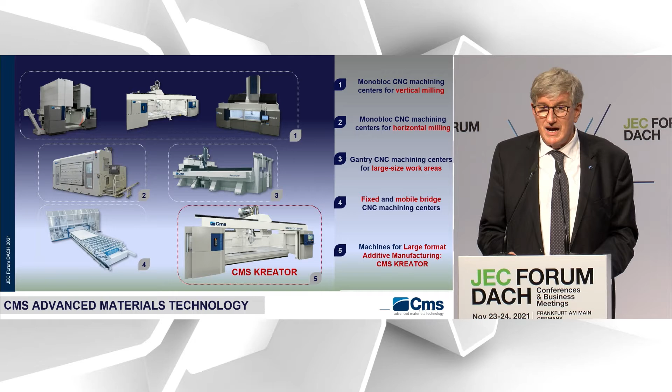We are in the machinery side, manufacturing CNC machining centers with different shapes, different sizes, and different functions. The latest one is CMS Kreator RS, a large format additive manufacturing hybrid machine.

Our sectors are the classical ones: composite, automotive, marine, aerospace, motorsport, railway, with a wide portfolio of special solutions.

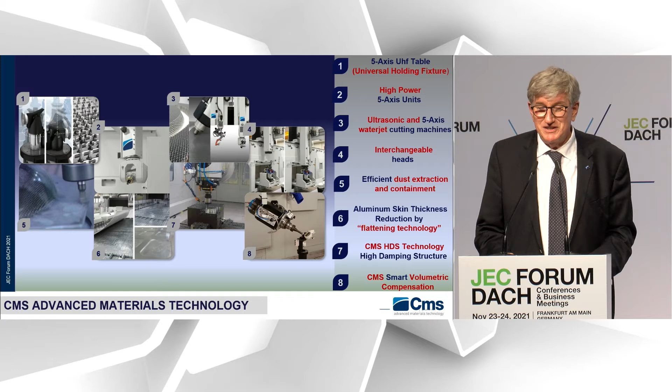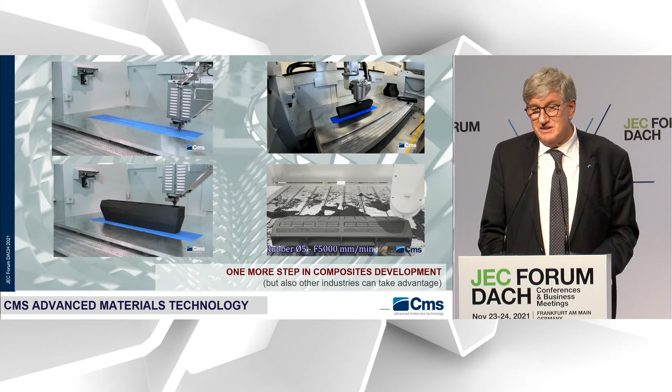I am not going into detail on every solution because it takes quite a long time. The latest solution is large format additive manufacturing combined with milling, that is CMS Kreator RS. One more step in composite development, but other industries can also take advantage of this.

A good question: why does a machine tool builder start to deal with additive manufacturing? That is far from our tradition, something completely new, needing a significant effort of research and development. This is why, to make money maybe not immediately, but in perspective, since additive manufacturing is a young technology, a young industry, a young market, but with a huge growing pace.

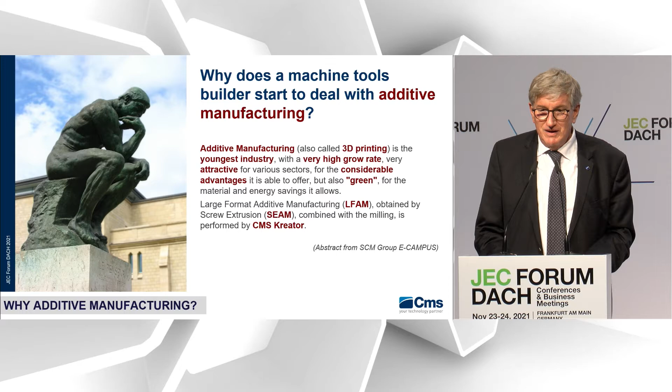Here we can understand visually what I mean when I say it's a young industry. In the timeline there are some milestones related to the composite industry: 1981, the first Formula One with a monocoque made of carbon fiber. In plastic industry, a good milestone is the Nobel Prize to Giulio Natta for isotactic polypropylene.

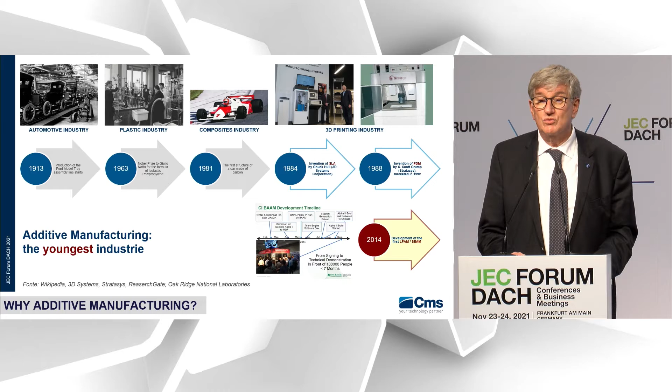In this time, you can see the growth rate. In the early stages, until 2009, the growth rate was not bad, 9%. But in the period from 2009 to 2019, the growth rate rose to 28%.

Why? Because additive manufacturing, starting from prototypes, goes to manufacturing, to industry. Especially large format additive manufacturing is focused on toolings. Toolings means 19% share of the overall market, and is interesting for aerospace, automotive, and industrial machines.

That is 61% of the growth in this decade. But marine can also take advantage of this. You will see where the great competitiveness of the new technology is: in terms of material, energy, and process time saving.

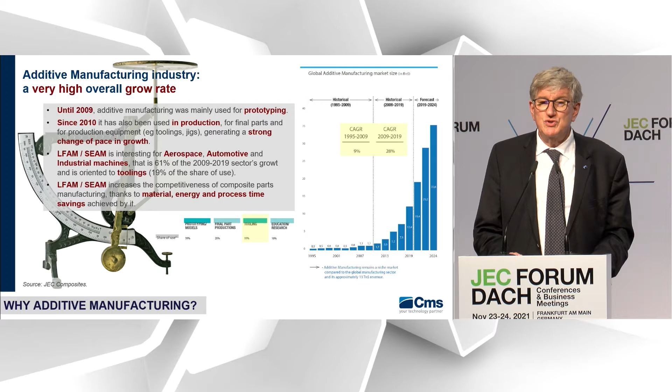Our solution has 4 milestones, 4 strong reasons why, as our marketing department likes to say: a unique solution. It is the only machine that fully integrates a machine tool for composite and a large format 3D printer, with a raw material cost saving factor more than 5 times compared to traditional technologies, and also 5 times less material than competitors to print the same part.

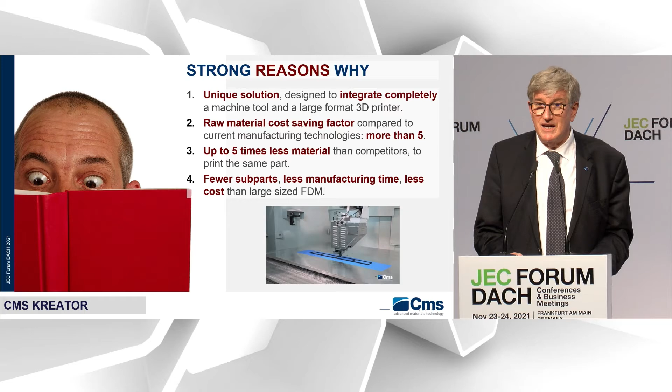In a context of FDM replacement: fewer subparts, less manufacturing time, and less cost than large-sized FDM. This is the machine. It is simply a CMS machining center, also coupled with an extruder to get screw extrusion additive manufacturing and standard milling.

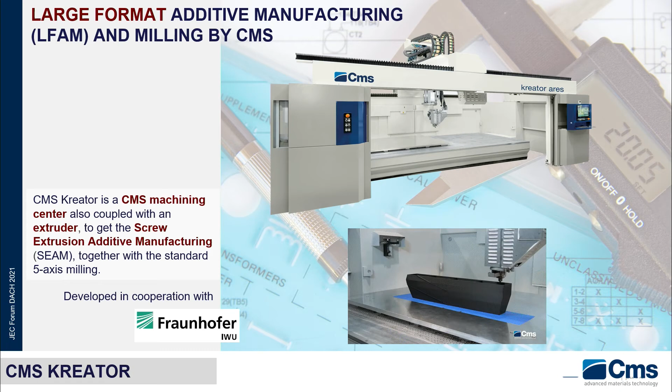We have developed this project in cooperation with Fraunhofer.

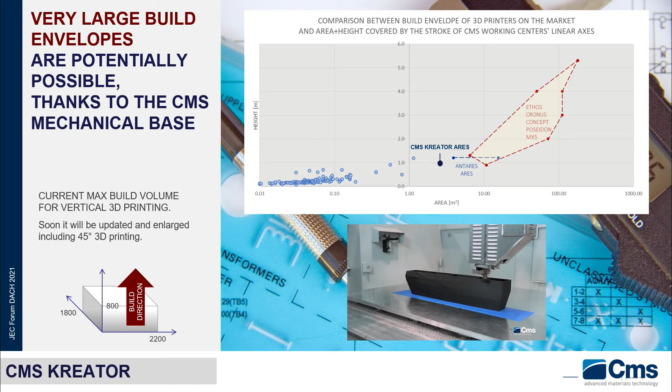In the picture you can see the huge perspective in terms of build volume that can be achieved by coupling additive manufacturing technology with a machine tool. On the right side you can see the range of strokes of our machines, and on the left side, the same position, that is the build volume of current 3D printers on the market. By the way, the max build volume has to be updated because every day we try to do something more, and you will see an example that explains better than figures what I mean.

One point is the quality of the extruded plastic. We have worked together with a prestigious Research and Development Institute because we would like to get the maximum obtainable quality of plastic. Just a figure that is not written there, but to understand what I mean.

The young modulus of this material printed in the picture, that is PA6 with 40% carbon fiber, is 13.6 gigapascal in the direction of printing. In the interlayer direction, which is the most critical measurement because it gives a precise indication of the quality of the 3D printing, we have a degrade of less than half, that is 6.5 gigapascal, more than plastic. You know, ABS is 2-3 gigapascal of young modulus. That means vacuum integrity, the impossibility of having voids and passing air or vacuum.

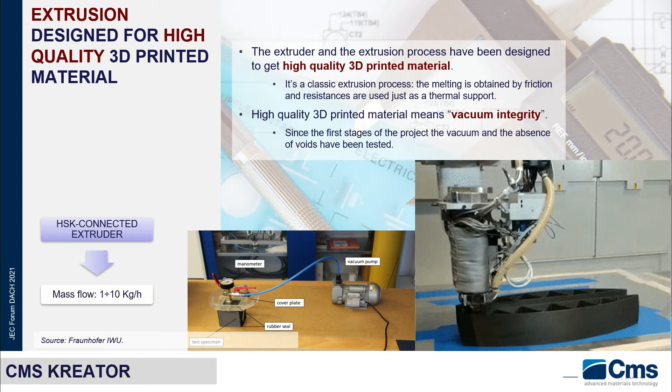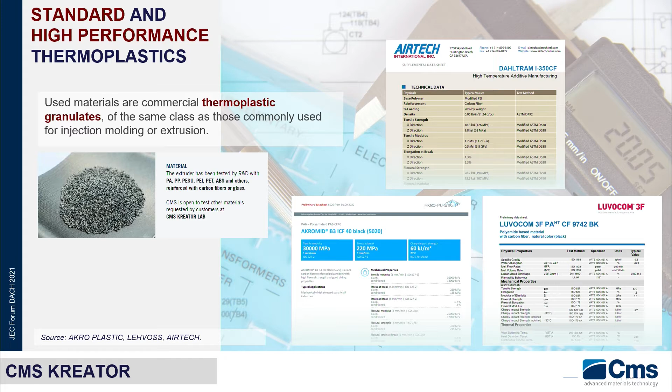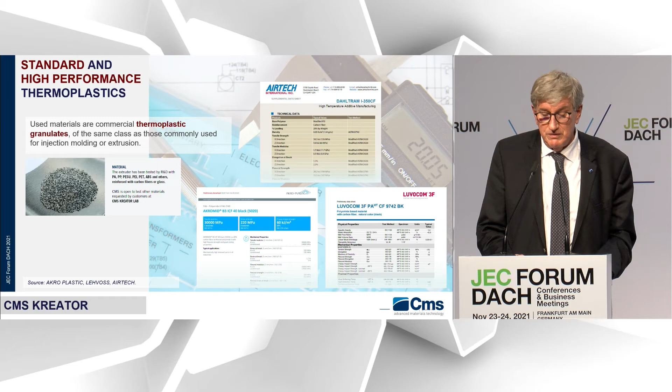We are using standard and high-performance thermoplastics, granulates, the same used in injection molding and extrusion plants. You can see the example of polymer that we are about to use, and have used. Last week we exhibited a direct mold for autoclave made by the Dahltram I-350CF. Our German partners have also tried, on the same extruder and same project, elastomers that are not interesting for us.

Integration between a machine tool and large format 3D printer means there are no hoses or cables dropping from the floor. There is a machine with a complete automatic change between milling and 3D printing: it is the electrospindle, the engine that moves the screw of the extruder. The electrospindle can pass from the mechanical tool to the extruder and vice versa with an automatic operation, as you can see there.

The material feeding system is fully integrated in the machine, that is, the hoses bringing the granulate to the extruder are completely inside the robotic chain of the machine. The material reloading and drying happens outside the machine, and after loading and drying the first lot, everything runs automatically.

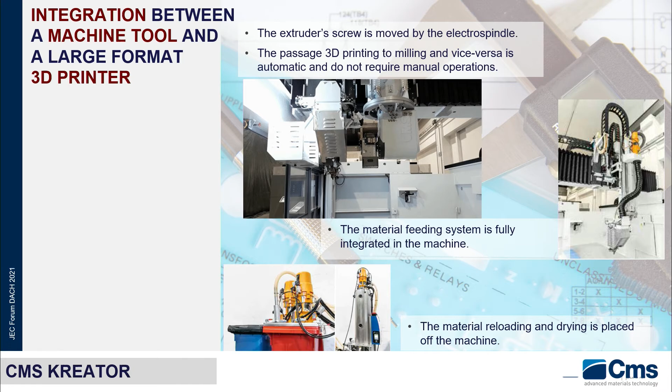Some examples: a machining jig like this - we don't have many examples we can disclose because we have several projects under mutual non-disclosure agreement, but this is a project I can disclose. A jig like that usually takes 8 days at a supplier. Here we talk about 3.5 hours for the 3D print, and not much more to mill it, because the 3D printing is just near net shape.

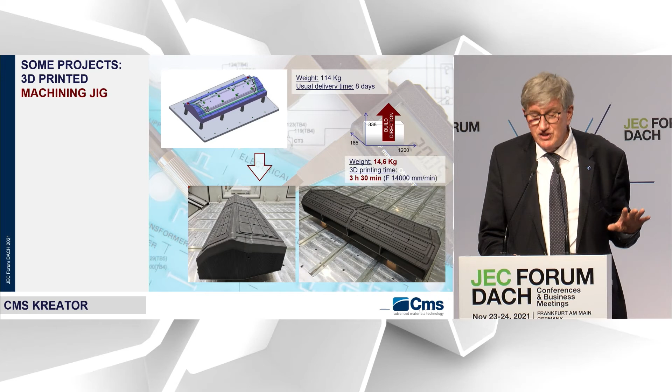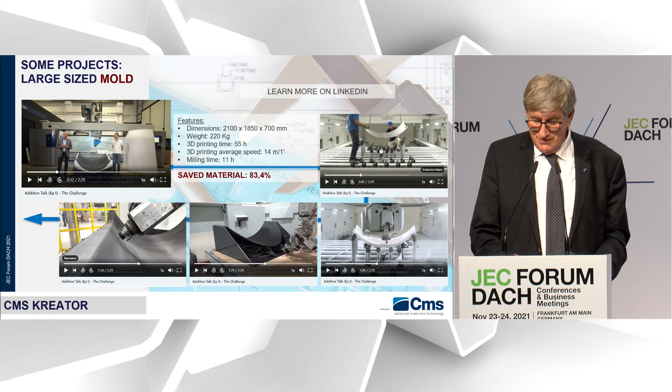We are also developing a large, high mass flow extruder, larger than the other one, up to 100 kilograms per hour, suited for marine applications. But the marine industry can also take advantage of the Kreator Ares, simply because there are a lot of parts to be manufactured with toolings of the size available on Kreator Ares.

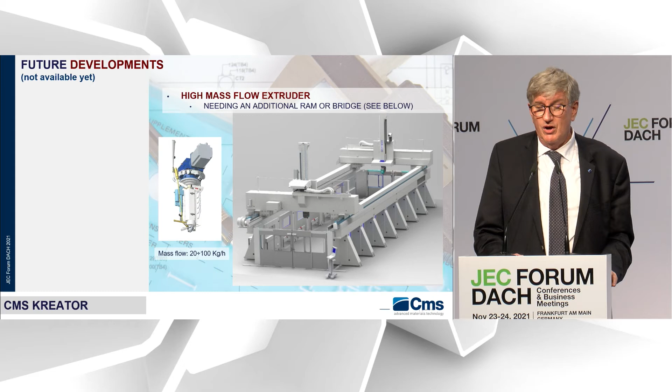More than 5 is the saving factor of raw material cost, because, as seen before, it's solid versus hollow. At the top you can see an epoxy ureol jig made with the traditional manufacturing way, and below, the same category of part 3D printed. 80% is the clear saving in material.

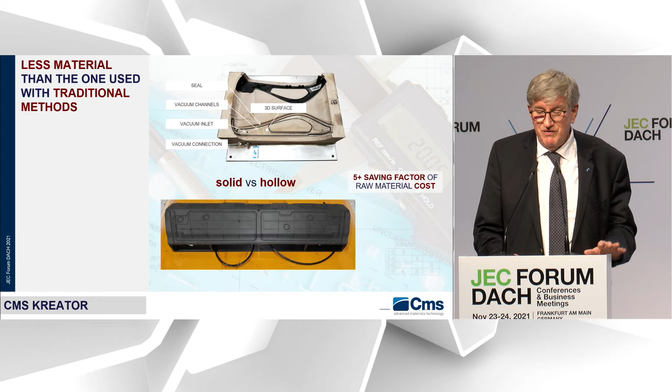And it is a green technology, because the first way to reduce plastic pollution is to use less plastic to manufacture the same part. And moreover, this plastic can be reused, but also it uses less material than the one used by competitors. Our aim is less material and more printing speed.

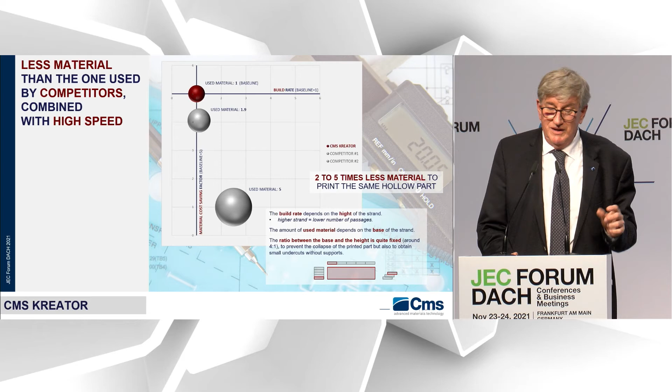We have up to 5 times less material to do the same part when compared to the same part manufactured by competitors, without mentioning the competitors. The secret is the section of the 3D printing strand. Usually, everyone uses a rate of 1 to 4 to allow some small undercuts. We can execute an undercut of 45 degrees. But if you have a bigger strand section, you are quicker in raising the part, but you are wasting a lot of material.

It can be used to manufacture toolings, but also other applications in the context of epoxy, ureol or similar replacement. This is an example of FDM replacement. The customer, we started the commercialization in March, and we have 3 machines delivered and 2 machines about to be delivered. We have started the production of other machines for future customers.

And the customer of these parts, which have been shaded for confidentiality, is manufacturing machining assembly jigs. And assembly jigs are made of a platform. Number 1 can be replaced by a normal aluminum profile, it is not significant. But part number 2 and number 3 are the reference surfaces to lay up the part on.

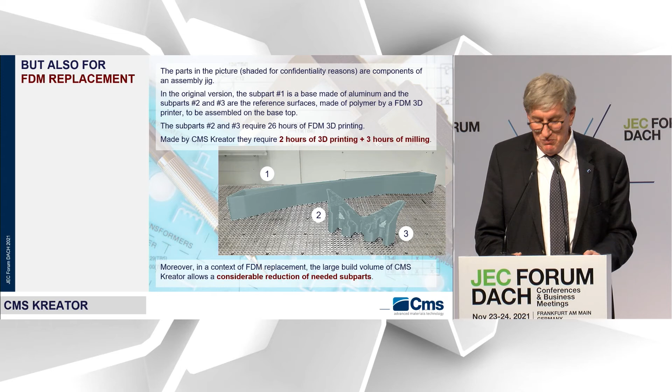Okay, part number 2 and number 3 on an FDM 3D printer took 26 hours of 3D printing. On Kreator, 2 hours of 3D printing and 3 hours of milling. A huge saving of material. And moreover, it is possible, thanks to the dimension, to reduce the number of subparts.

Okay, we have seen that the 5 points are confirmed. A unique solution that completely integrates a machine tool and large format 3D printing. More than 5 is the cost-saving factor compared to current manufacturing technologies, but also up to 5 times less material than competitors to print the same part, and fewer subparts, in a context of extension of the capability of FDM 3D printing, in a context of FDM replacement.

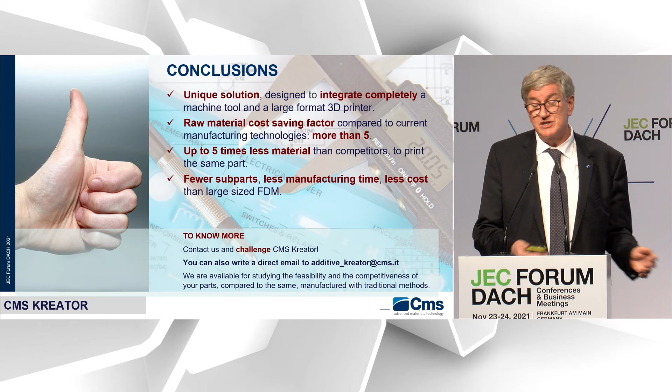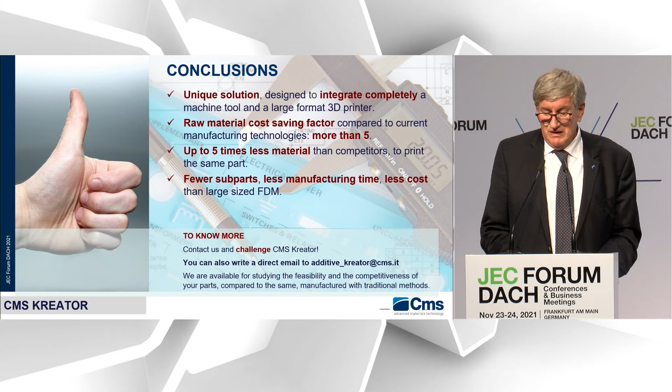Our policy with new customers is: contact us and challenge CMS Kreator together. We first propose to the customer a confidentiality agreement, so we are more free to exchange information. And then I recommend the customer give us a couple of parts to be tested on Kreator for 3D printing. I recommend not the most complicated part of your life, nor the simplest one, but an intermediate part. We will study the feasibility, because it is a new technology. Feasibility is not assured for all.

The way to cut the part, to have subparts or not. If possible, we do it monolithic. Times and cost of material on the computer. Then after the customer confirms the competitiveness of the new technology, we print the part, all this free of charge naturally. And we show the customer the way to use the machine, because it is a new technology. We know that after having used the machine, customers are more able than us to use the machine and maybe more effective on the machine than us.

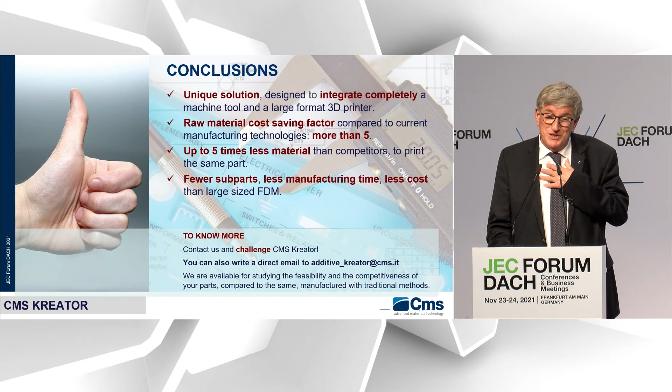Some time ago, I visited a CMS customer working on Formula One in the Midlands of the UK. And I discovered that the way they are treating the machine allows them to reach accuracies much higher than the accuracies we declare in our documents, both official, that is contractual, and also in brochures. So, I ask you if you have some questions. I am glad to answer.

Thank you very much, Maurizio. Thank you to you. An applause for our CMS representative. Are there any questions in the room? Yes. Could you please bring the microphone close to the lady from BMW, our keynote speaker? Thank you. Hi, Eva Hunikel from BMW.

Are you able to start and stop the process during the extrusion? Very good question. We are able to start and stop the process, but for a short time. And we are studying the way to start and stop the process until the day after, I'd say. Because the point is, the quality of 3D printing is given by the thermal condition between the already 3D printed layer and the new 3D printed layer.

There is a window of heat, of temperature, with an upper limit where it is not possible to 3D print because of the viscosity, too low viscosity because of the heat. And the lower limit where the connection between the two layers is too weak. The connection between two layers, we have 9 people working on it at the Kreator Additive Lab.